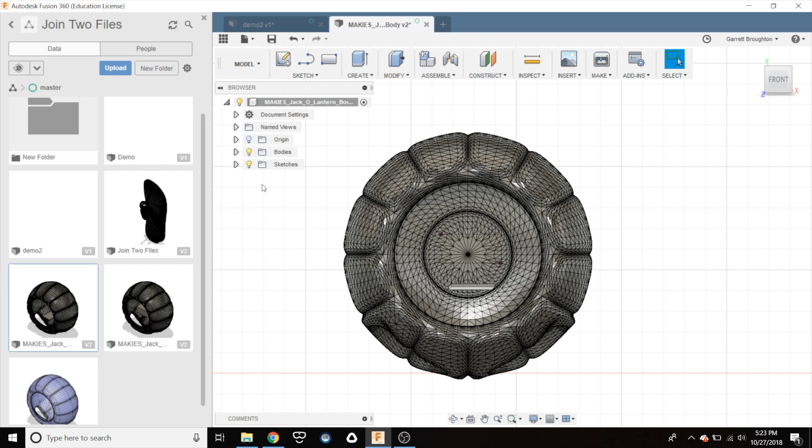So first thing I'll do is upload the STL file. So the one I downloaded, the body here. The first thing I'm going to do is change to model, select it, right click, change mesh to BRep. That way we can modify it. And it's going to change from blue to black. It'll say, do you want to convert? And say yes. Okay, so once that's changed to BRep, it'll be in black color. Now we can go ahead and modify it.

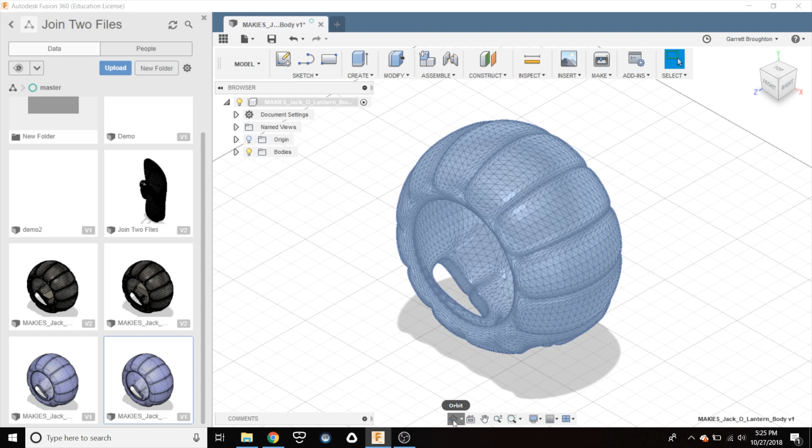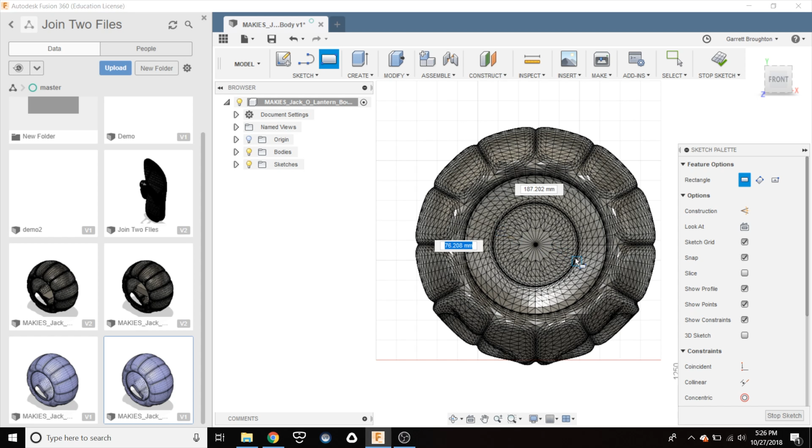So in this case, let's change the view of it. And what we're gonna do to customize it is we're gonna create this stand to hold the phone inside the pumpkin. So now we're gonna create a rectangle, select the rectangle tool. Then select the plane, so we're looking at the top view, so we're gonna select the top plane. Then it says, go ahead and place your first corner, so we're just gonna go right there. And then the second corner is for the size. We're gonna go right there. Okay, then we're gonna go up here and stop sketch. I'll go ahead and zoom in on here.

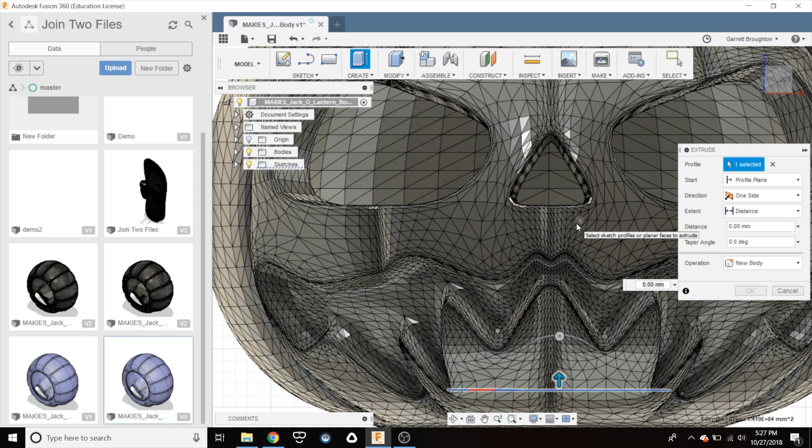What we're gonna do now is we're actually gonna extrude it. So you go up here to extrude, and in this wizard it's asking you to select. We're gonna select the rectangle we just created. We're gonna say new body. Then we're gonna come up here, change the view. That way I can see what's going on. Scroll out a little bit, and we're gonna make it the height of about 300 millimeters. There we go. And then we're gonna say new body, and we're gonna hit OK. All right, so now we have our support beam.

Then what we're gonna do is we're gonna join these two bodies. So we're gonna go modify, combine. The wizard's gonna ask for two, so we're gonna select this body. Takes a second. Then we're gonna select this body. We're gonna say join, and we're gonna say OK. As you can see, I had a little mistake there. You wouldn't select this one here. I selected it when I extruded it. That's why I brought it up.

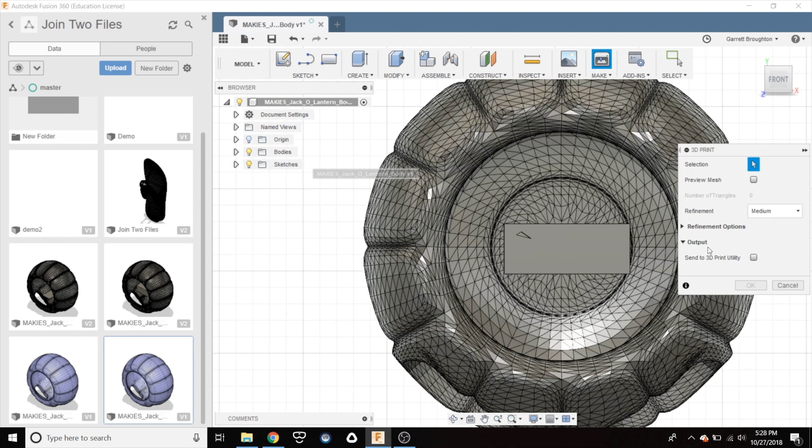Okay, now the last step is to go ahead and make, 3D print. I do not output to the printer, so I just make my selection, do OK, and we're gonna save it. And now it's ready to open in our slicing tool, Cura. As you see, it shows up much larger here. I'm going to scale it down to about 180 millimeters to fit my print bed. And let's take a second look at it. And there you go. You can see it's got the support beam, and that's what we'll use to hold on our phone. And it's ready to print. Check out my other 3D printing video if you want to see all the options that I chose to make this a successful print.

I hope you found this video useful for making some modifications with your 3D printed templates from Thingiverse and Fusion 360. In a future video, I'd like to create some more with Fusion 360.